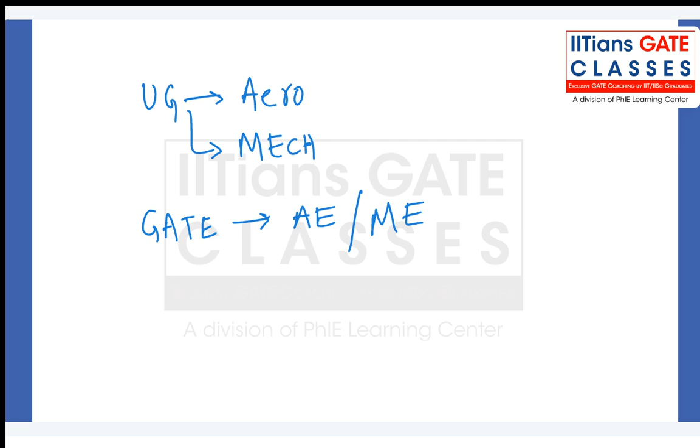Okay, one second, we'll write a few things about the GATE exam. I think most of you know this, but if somebody does not, I will tell you. Most of you have done your undergraduate in aerospace, right? UG in aero - most of you are from there, and some are from mechanical also.

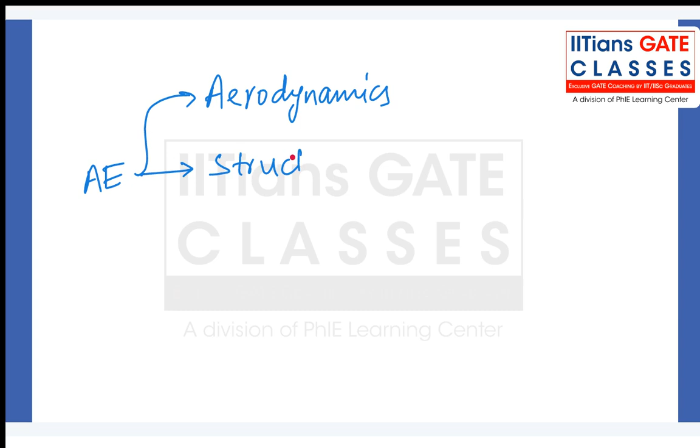In aerospace engineering, we broadly divide it into four parts, right? Basically four domains: one is aerodynamics, one is structures, other is propulsion, then we have controls, right? So these are the four domains into which aerospace engineering is divided broadly.

In aerodynamics, you get your fluid mechanics - actually the domain name is aerodynamics, but there is one more subject you will study which is also called aerodynamics, with the same name. Then there is one subject you will study called gas dynamics or compressible flow. These three subjects you will study in the aerodynamics domain.

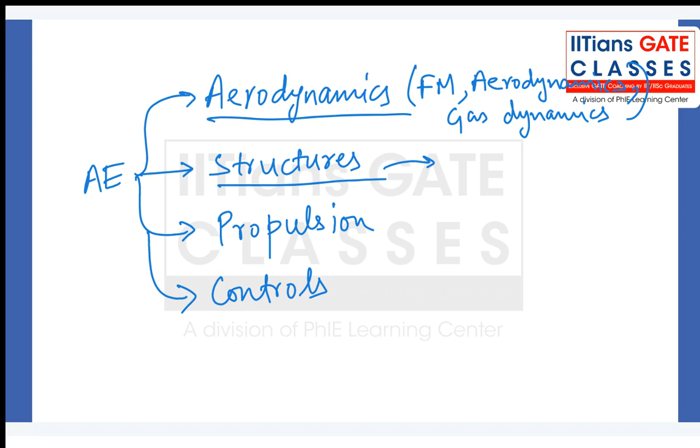Then there is structures, where you will have strength of materials or machine dynamics, something like this. Then propulsion will be your thermodynamics and related subjects - applied thermal, like Brayton cycle, power cycles basically, Rankine cycle, those kind of things you will study. Steam turbine, steam compressor, axial flow compressor - these kind of things you will study in the propulsion domain, right?

Then control is basically the electronics part of aerospace engineering, right? So in the last batch also, there were one or two students who had an electrical or electronics background, but they wanted to write GATE aerospace engineering because they wanted to go into controls. So for them, controls is a nice step to enter into the aerospace engineering field.

For people doing their undergraduate in aerospace engineering, you must have studied all four of these parts in your BTech, right - some basics about all of these four domains. So for you, all four of these domains are okay to proceed in, like if you are going for masters or something like this.

For people coming from a mechanical background, aerodynamics is actually a very nice branch because it has fluid dynamics, compressible fluid dynamics, those kind of things. And then you have structures where strength of materials will be used, machine design will be used for people from mechanical background. Then for propulsion, you guys already study thermodynamics, applied thermal engineering, power plant engineering - those kind of things will be used in propulsion.

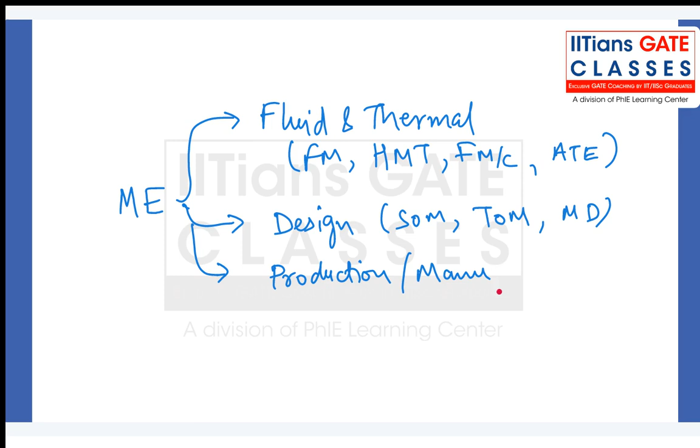Then for mechanical, the other part is design. In design, we basically study SOM (strength of materials), theory of machines, and machine design. These are a few subjects. Then there is production engineering or manufacturing part - this is for people writing the GATE mechanical engineering exam.

And then there is something called industrial engineering. It is basically related to increasing productivity of a production system, so it's a little bit related to MBA basically - business administration. So we have design, fluid, and production - these are the main departments in mechanical engineering.

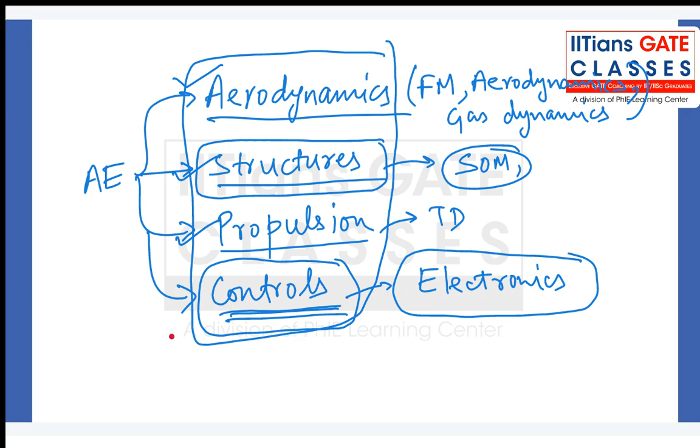So whenever you write GATE in aerospace engineering or mechanical engineering, it doesn't matter - fluid is the common part in both of these cases.

Now we will talk about the GATE exam. All of us know it is a 100 marks exam, where you get 70 marks for your core, whatever you have prepared, and 30 marks for maths and aptitude, which is common for all papers. So this 70 marks is what you are preparing for during your BTech. Suppose you are from aerospace engineering, this will be your 70 marks. Then from mechanical, your mechanical core will be there.

Then there comes one new paper which is called XE, or Engineering Sciences. Actually, I will say this is kind of a loophole for people who want to go for further studies, for postgraduate studies, MTech or PhDs, because IITs and IISc take students who have written GATE XE also for their MTech or PhD programs. XE actually is a very nice exam for people who have started very late in their preparations.

Why? Because in XE, you will get your 30 marks paper, same, maths and aptitude. Then there is a 70 marks paper, divided into two sections. Let's call this section 1 and section 2. Each will be of 35 marks. You have to solve this for 30 marks, this for 35, this for 35 - whole will make your 100 marks paper in XE.

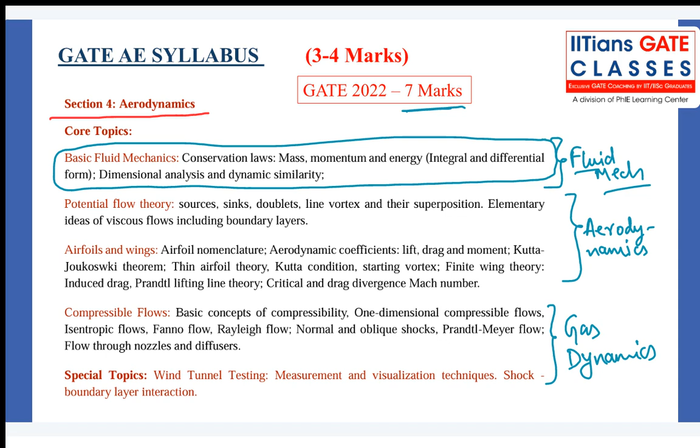For mechanical people, the weightage is quite more. It's 6 to 9 marks out of 65, out of 70. So you can say it's around 12 to 13% of your GATE exam.

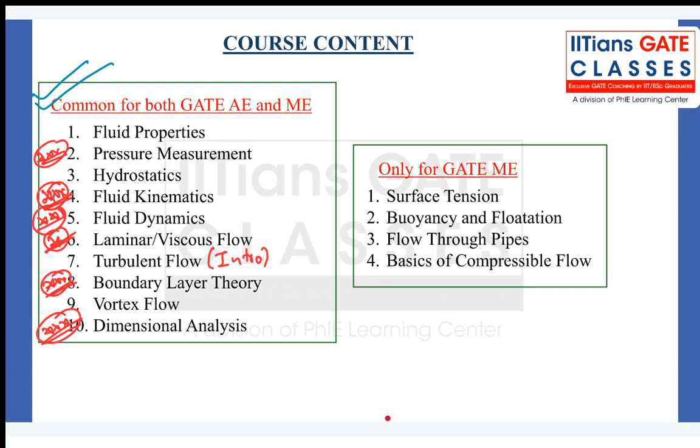Okay, so next. Okay, so I will tell you a few reference books.

There is one book called Cengel and Cimbala. Few people call it Chengel or Cengel, whatever you like to call it, and Cimbala. It's a very nice story-like book. Whenever you read any topic, you will feel like the book is talking to you. It's a very good book for concept building.

Then we have F.M. White, Frank M. White. He also has a very nice book for good concepts and good numericals. Then we have Som, Chakrabarti and Biswas. It's a more mathematical kind of book. Most of the topics they have explained in a mathematical way, not with a physical approach.

Then we have K. Subramanya. He has written a book with 1,000 problems in fluid mechanics. So it's a very nice book for problem solving. If you guys want to solve some nice problems, you can refer to this book.

Which is for thermodynamics, Cengel? Okay.

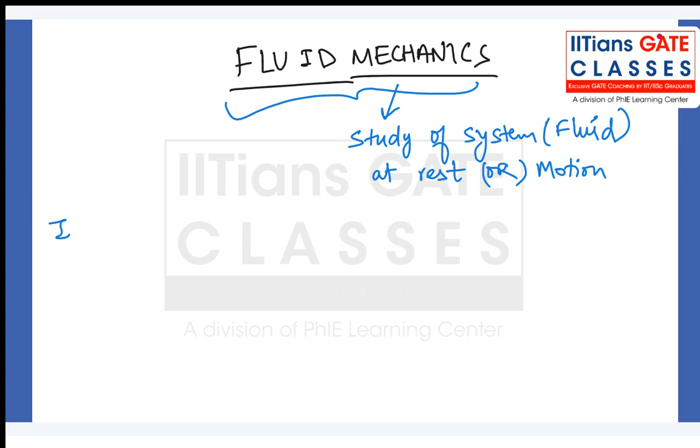It is the science which deals with fluid. Fluid means liquid or gases, anything which can flow, in rest or motion. So basically we are dealing with fluids which are either at rest or in motion.

Now my question to you guys is, what is a fluid? Because all of us understand what is rest, what is motion, but do we understand what is a fluid? To study fluid mechanics you have to understand both of these words, what is a fluid and what is mechanics. For mechanics we have defined this part, but for fluid we have yet to define it.

Then comes our second subtopic, which is fluid versus solid. What is fluid, and how is it different from solid? I will take two cases. For part A, let us say this is my ground, and I have this metallic block or wooden block, let us say it is a solid block.

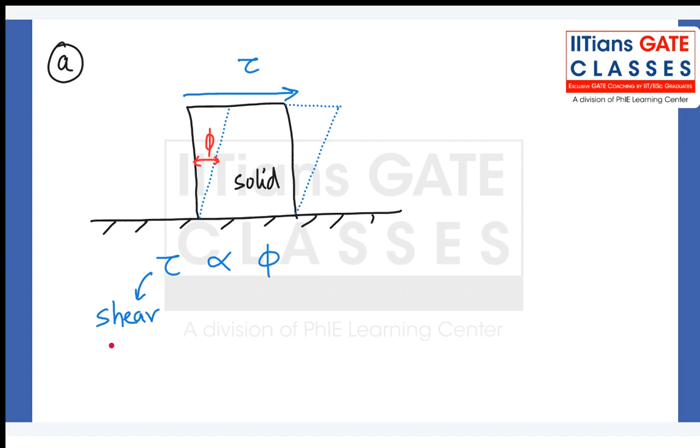Now what I am doing here is applying a shear stress on this surface. What will happen? The body will deform something like this, at some angle phi. Shear stress is proportional to shear strain, this angle phi. As I increase the shear stress, it will increase the shear strain. If I decrease the shear stress, it will decrease the shear strain.

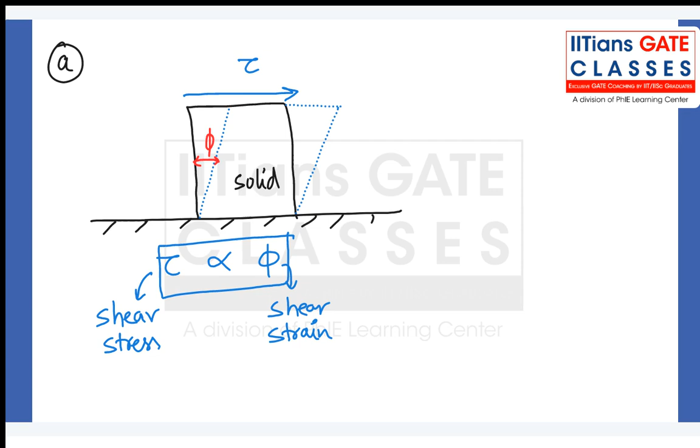That is what is meant by this proportionality sign, and to remove this proportionality sign, we introduce a constant g, which is tau by phi.

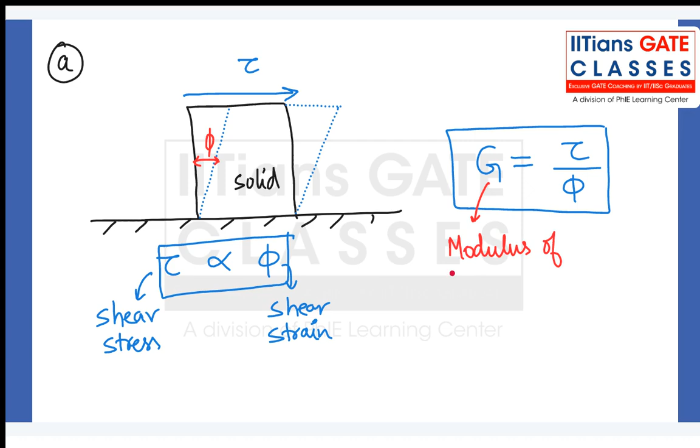This g is called the modulus of rigidity or shear modulus. We are applying shear stress and shear strain is being developed, so this modulus is called the shear modulus.

So this was about solid. What happens in a solid? Let us take... okay, I will make one graph here.

Let us say for the x-axis I have shear strain phi, and for the y-axis I have shear stress tau, and I will plot this. Here we can easily see shear stress is proportional to shear strain. As shear stress increases, shear strain will also increase. So the graph will go something like this, a straight line graph.

If you have a little idea about strength of materials, in class 11th you have also studied this stress-strain relationship. It goes something like this, and this is the fracture point.

My purpose of drawing this part is to show: for value of shear stress tau 1, we have a value of shear strain phi 1. For value of shear stress tau 2, we have value of shear strain phi 2. This is what direct proportionality means - for one value of shear stress, we have one value of shear strain.

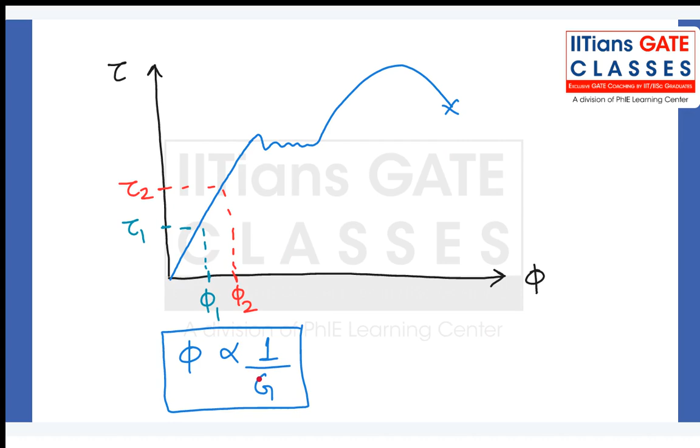In this case, I'm talking about when shear stress is not zero, when we are applying some shear stress. At that condition, if there is no shear strain, if phi is zero, this implies modulus of rigidity will tend to infinity. This kind of body, which shows no shear strain even after applying shear stress, is called a rigid body.

I think you guys have heard these terms before - what is a rigid body, what is an elastic body, those kinds of things. And if you don't know, don't worry, you will study these things again in the strength of materials topic.

Okay, so this was a little introduction about solids - what happens in solids. Now let us enter into the domain of fluids. What happens in fluids?

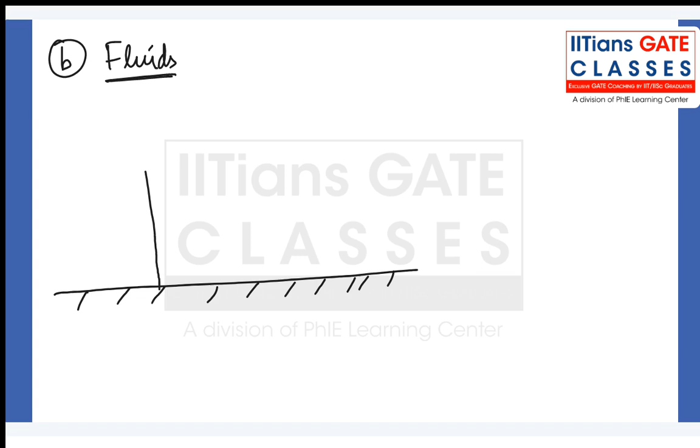Now again, I am making one reference ground level. Again, I will take one test element, but earlier it was solid, this time it is fluid. Again, I am applying some shear stress on this surface. Now what will happen?

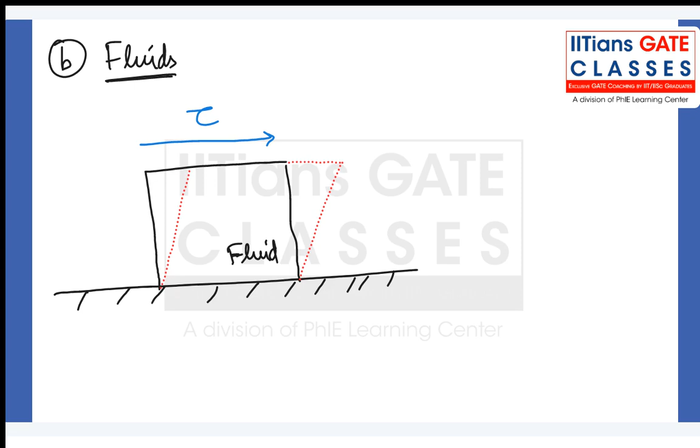Now things will change a little bit - it will continuously deform. Let us say at some time t1, we get our fluid element like this. At some time t2, we get it like this. At some time t3, we get it like this. So this is at time t1, time t2, time t3.

So our fluid element will change shape. Earlier also it changed shape, and right now, in this case too, it will change shape. But what is the difference here? Let us say this is angle phi 1, this is angle phi 2, and this whole is angle phi 3.

In the earlier case, our shear stress was proportional to shear strain. For one value of shear stress, we were getting one value of shear strain - a straight line, directly proportional graph. In this case, I have applied a single value of shear stress, but I am getting multiple values of shear strain.

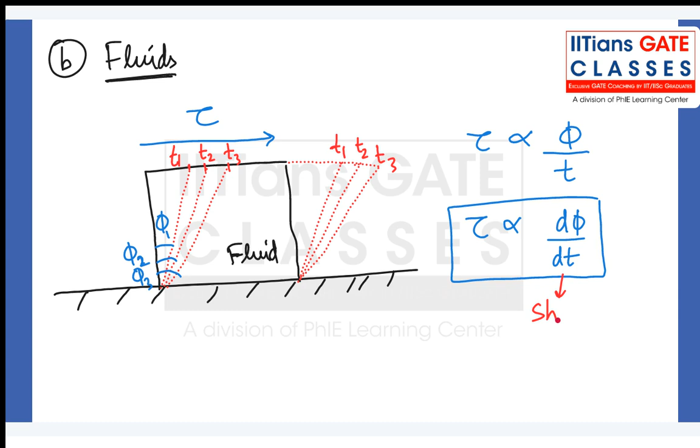Shear strain is dependent on time, it is a function of time - shear strain is changing. So earlier, shear stress was proportional to shear strain, but now it is proportional to strain by time, or strain rate. In differential terms, I can write tau proportional to d phi by dt, where this d phi by dt is called the shear strain rate - how shear strain is changing with respect to time.

Earlier it was a constant shear strain value. Now the shear strain value is not constant, it is changing with time, even though we are not changing the shear stress value.

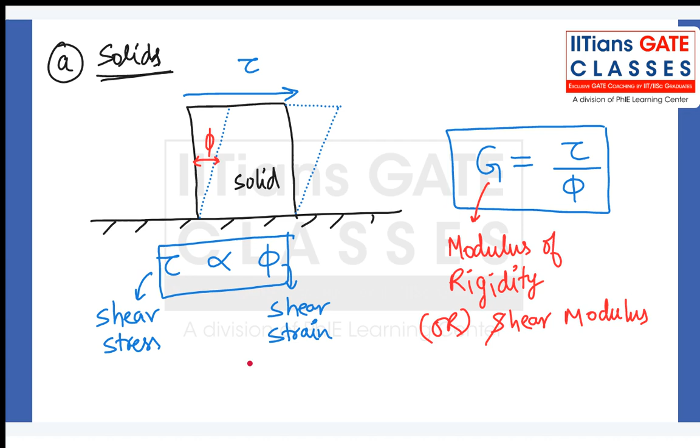Earlier, to remove this sign of proportionality, we introduced the modulus of rigidity, G. Again, we have to remove this constant of proportionality, so we will introduce a new term called mu. Tau will come out to be mu times d phi by dt. Now this mu thing is actually very important.

We will study about it in great detail. So for now, let us say this mu will come out to be tau divided by d phi by dt, right? And for shear stress to be constant, let's say one case where I'm not changing shear stress.

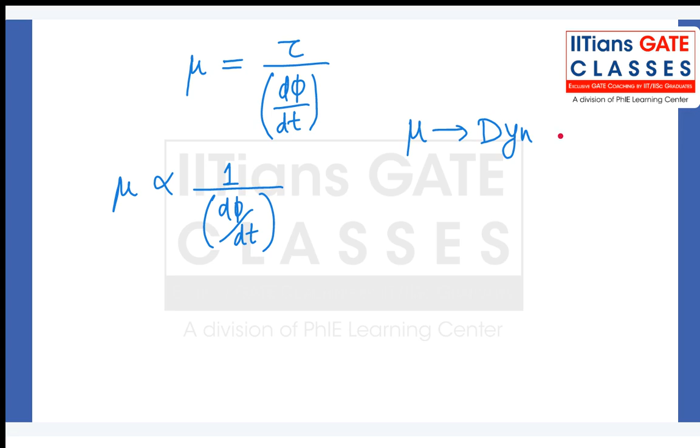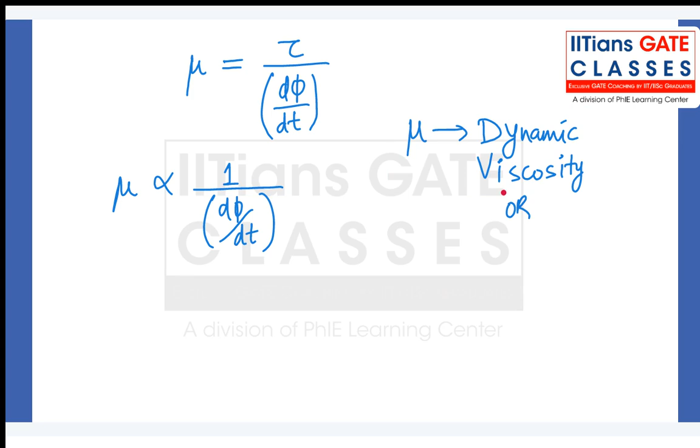So mu is inversely proportional to rate of shear strain, right? So I can say one thing. Let me name this part first. This mu is called as dynamic viscosity, or simply few people call it as viscosity. So I will write it as dynamic viscosity or simply viscosity. If viscosity is mentioned or dynamic viscosity is mentioned, you will always assume it to be mu.

Why am I telling you this? Because there is one more kind of viscosity which is called kinematic viscosity. So when we study this viscosity part in detail, most probably tomorrow or in the next class, I will introduce you to this new term called kinematic viscosity, and we will see the difference between these two things.

So here what I wrote is that mu is inversely proportional to rate of shear strain. So as rate of shear strain increases, mu will decrease, or vice versa, right? So let us say I have two cases here.

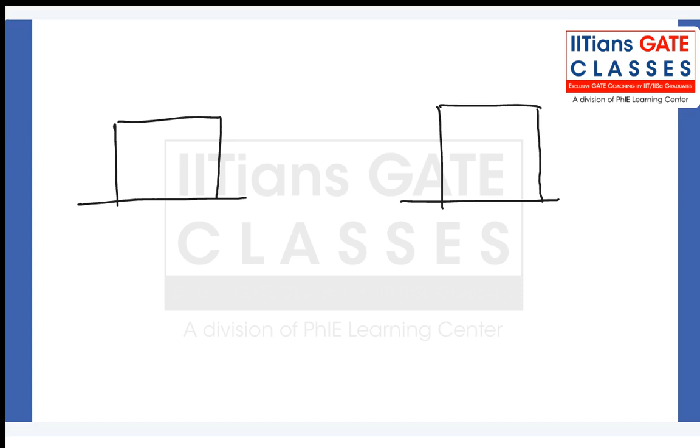Let us say I have two different fluids. One fluid element is like this, and the other fluid element is like this. And I'm applying the same value of shear stress on both of them. Tau is same for both fluids, and both will have some deformation. Let us suppose this fluid deforms like this, and this one deforms like this. So we have this angle as phi 1 and this as phi 2. And let us say this deformation took dt time in both the cases.

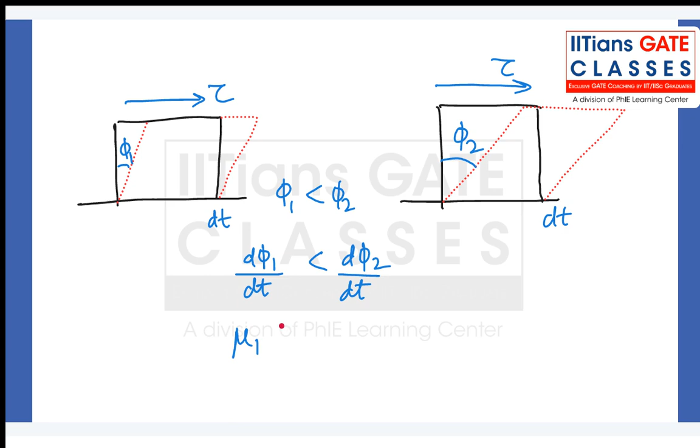So since time is same in both cases, I can write d phi 1 by dt less than d phi 2 by dt, because phi 1 is less than phi 2. And since viscosity is inversely proportional to shear strain rate, I can write mu1 greater than mu2. This means for same shear stress, fluid 1 is showing less deformation. This means it is more viscous, so mu1 is more than mu2.

Is there some doubt, or is this picture clear? Sir, is mu1 having more stress? See, tau value is same in both the cases, time is also same in both the cases. Only difference is these shear strain angles, phi 1 and phi 2. So this means we can conclude: for same shear stress at same time, if some fluid gives less deformation, that fluid is more viscous.

So with that, we introduce a new property called fluidity, which is nothing but 1 by mu, known by F. So I can write mu1 greater than mu2, or F1 less than F2 — fluidity of 1 is less than fluidity of 2. Actually nobody uses this property called fluidity, but for the sake of information, I am telling you it exists. In most cases, you will deal with mu only.

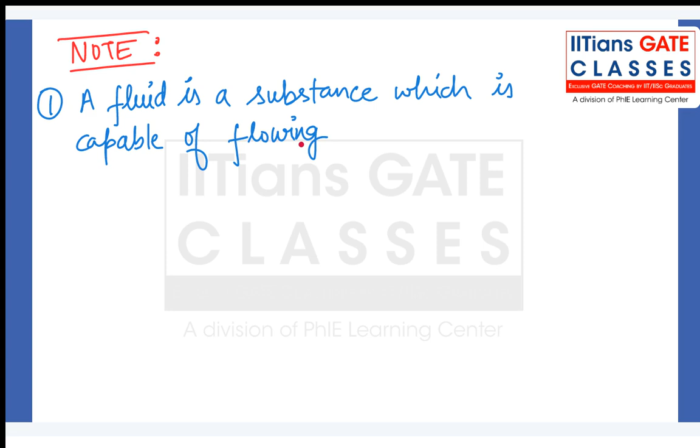And what does this term flowing mean? Continuous change of shear strain, yes. Flowing or deforming under the action of shear force, however small the force may be.

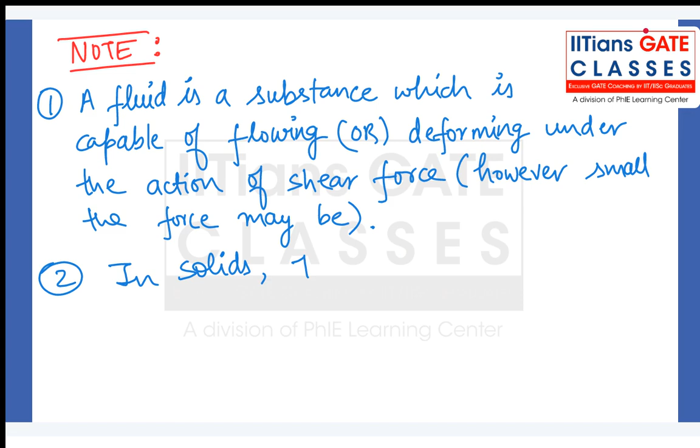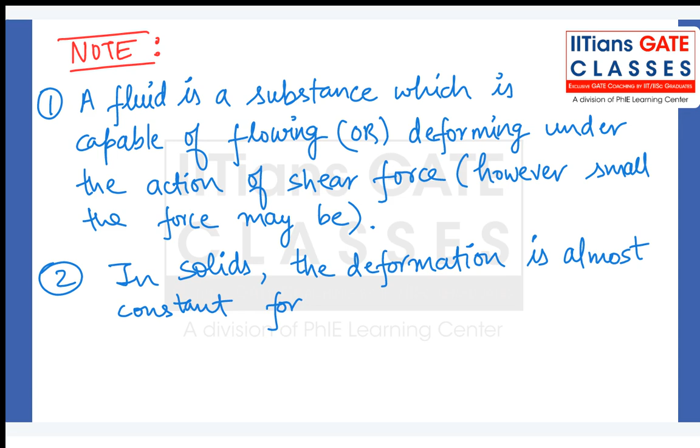Point number two. In solids, the deformation is almost constant for a given stress. Basically, for one value of stress, we have one value of strain.

But in fluids, the deformation changes with time. So in fluids, rate of deformation is more important than deformation itself.

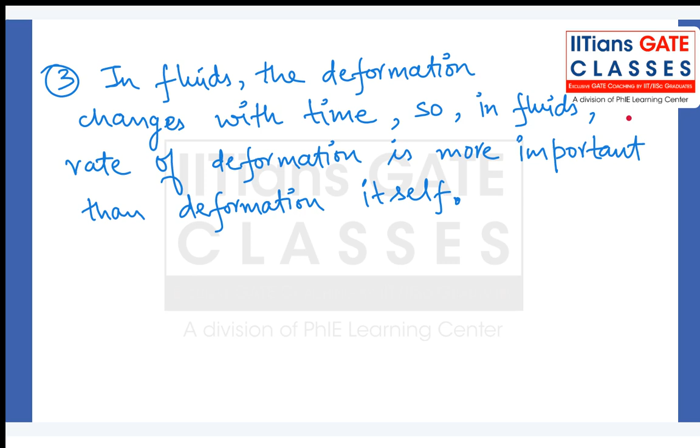Right, so I will summarize. I will make a summary table actually: solids versus fluids, what are the things we have studied. For solid, we have tau proportional to phi, and tau is equal to G phi. For fluids, we have tau proportional to d phi by dt, and tau is equal to mu d phi by dt.

Okay, so now let us enter into the next topic, which is the topic of continuum, concept of continuum.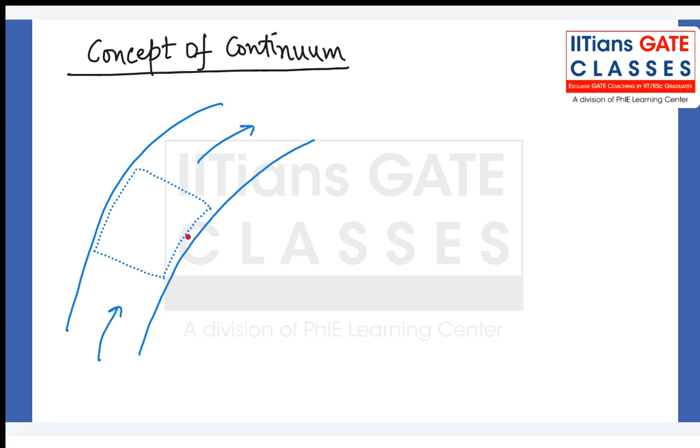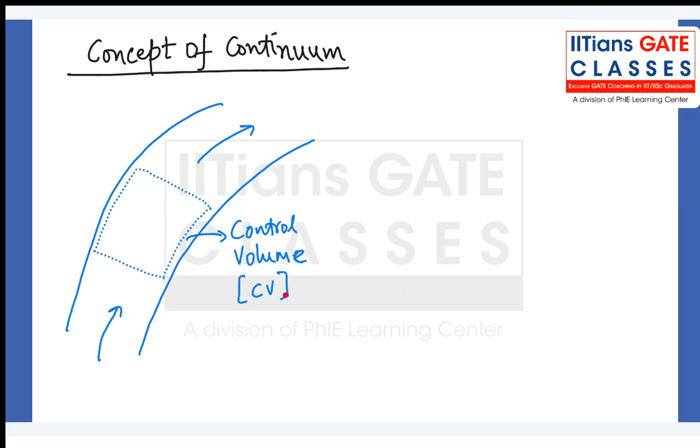So let us start this. Let me say this is a fluid column, a fluid is flowing like this. I will take a test element here for my analysis. I will mark an area or mark a volume for my analysis, whatever I want to check, let's say how the acceleration is changing, or the velocity, or the pressure, density, whatever property I want to check. I have marked this volume in this flow, and let's say the fluid is flowing in this direction, and I have marked my volume here. So this kind of area of interest is actually called as control volume, or in short, CV.

So for my control volume, this is nothing but my area of interest. Like in thermodynamics, you guys are familiar with the terms system and surrounding, right? System is the part of the universe which is under your consideration right now, on which you are focused, what changes this part will show me, that is your system. Anything away from the system is surrounding for you, and system plus surrounding makes the complete universe. This is the first topic taught in thermodynamics class. So in fluid mechanics, we call that system as control volume, nothing else, it's not a new thing. So for that control volume, there is one thing called characteristic length, LC.

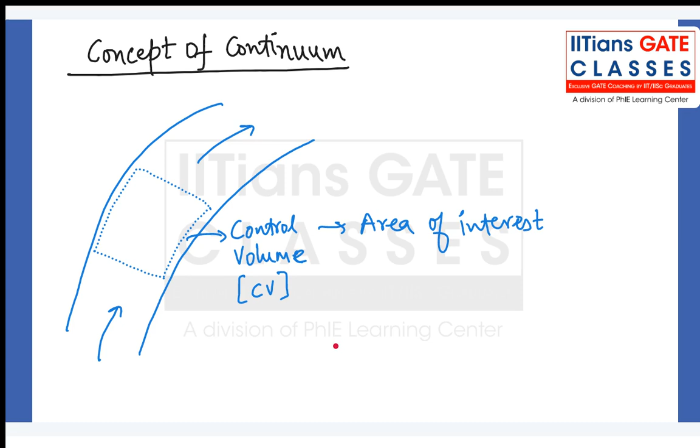Characteristic length, it is written by LC, or some people call it characteristic dimension. It doesn't matter what you call it, at the end of the day it is a length, nothing else. This is the length which is used to define dimensionless numbers.

We have a topic which is actually the last topic in this subject, called dimensional analysis and similarity. In dimensional analysis, I will explain what this characteristic length is, and what dimensionless numbers are. But for now, there's a very famous dimensionless number which you guys already know, called Reynolds number. You guys already know this part, this is what I'm assuming.

If somebody is not aware of Reynolds number, or has not heard about it, please tell me now. Otherwise I will assume you have heard this name. So everybody has heard it, right? This Reynolds number, what does it tell you? Whether the flow is laminar or turbulent. Reynolds number tells you this thing. What is this Reynolds number, how is it defined? Those things we will discuss in the dimensional analysis chapter.

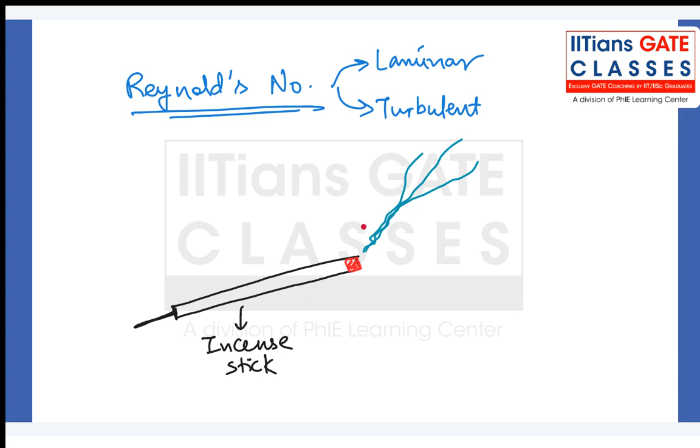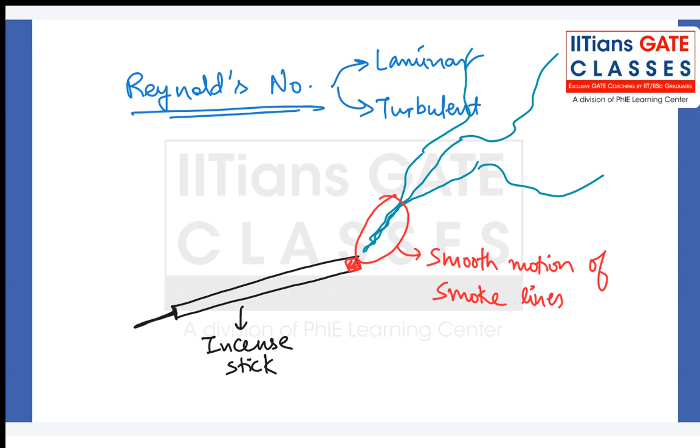So you will see the smoke lines initially. The smoke lines will be traveling in a very smooth manner, a smooth motion of smoke lines. Initially they will travel very smoothly. After traveling some distance, they will go like this, one line will go like this, something like this. Some haphazard motion will start. I think all of you have observed this. So this is haphazard motion, and this is the smooth motion.

Now this haphazard motion actually corresponds to turbulent flow. This smooth motion corresponds to laminar flow. So I'm just giving a very basic idea of how you, in your daily life, see laminar and turbulent flows.

Correct? Sir, I cannot understand the difference, sir. Okay, so you have never seen an incense stick? Yes sir. Or, for that matter, if you smoke, have you ever seen somebody smoking a cigarette? Yes sir, you have seen it, right?

So near the tip where it is burning, the smoke leaves in a very smooth manner, right? After traveling some distance, the gas particles disperse and move in their own directions, they are not moving together or moving smoothly. So these are two different kinds of motion of the smoke particles in that regime. The one which is smooth is called laminar flow, and the one which is moving haphazardly is called turbulent flow. Okay sir, now I understood. I'm giving you a very crude example right now, but still for initial purposes this example is okay. So let us understand what is laminar and what is turbulent very crudely for now.

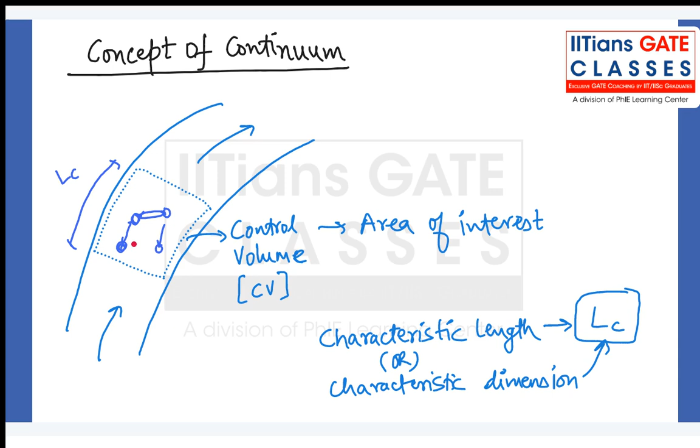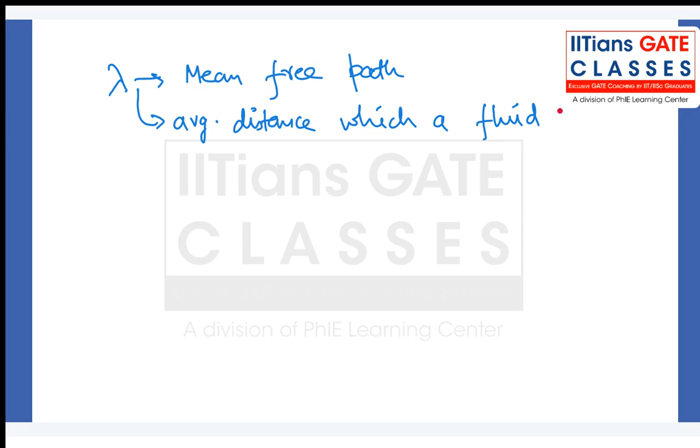Now there is a term called lambda, which is called the mean free path. What is this mean free path? It is the average distance which a fluid particle has traveled since its last collision. Try to understand this definition: since its last collision.

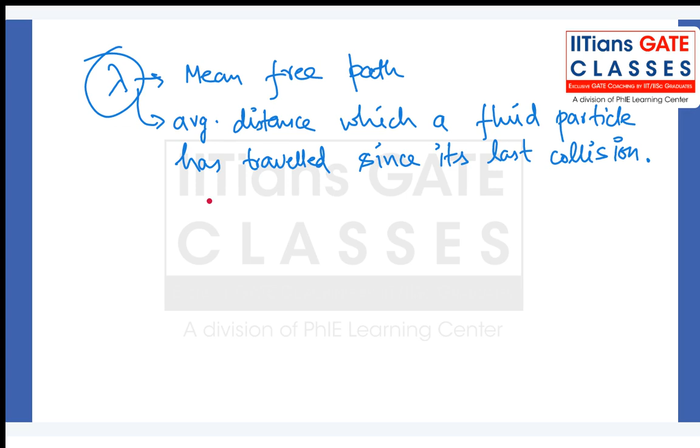Now I will make one control volume here. This is my control volume, and there are molecules, or fluid particles, inside it. Let us suppose there are some number of fluid particles here, and obviously they will collide into each other. Something like this.

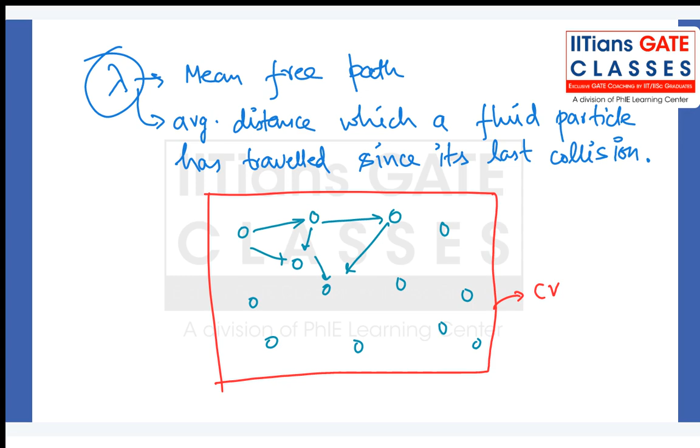And I have one more control volume. Let us say this is CV2, and this is CV1 — control volume 1, control volume 2. In this control volume 1, let us say there are only three fluid particles. They will also collide into each other, it doesn't matter. This lambda, or mean free path, is the distance which a fluid particle has traveled since its last collision. Let us say this has lambda 1 as mean free path, and this is lambda 2 as mean free path. Tell me, what will be larger, lambda 1 or lambda 2?

For the time being, assume both control volumes are of the same size. I have drawn them differently, but let us assume the size of the control volume is the same. Now tell me, will lambda 1 be bigger or lambda 2 be bigger? Lambda 1 will be bigger, right? Because the number of fluid particles is less in the same control volume size.

So what I mean is the characteristic length LC of control volume 1 and LC of control volume 2 is the same: LC1 equal to LC2. This means the size of the control volume is same, but still lambda 1 is more than lambda 2. Why? Because the number of molecules is less in CV1. So the mean free path of control volume 1 will be more than that of control volume 2, because of the difference in the number of fluid particles.

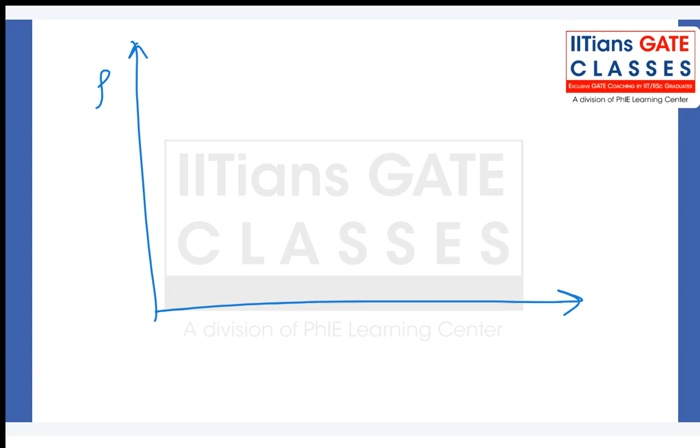Now comes the concept of continuum. This is my density — on the y-axis I have made a rho, or density, curve. Density simply means how densely fluid particles are packed inside a control volume. I can say density of 2 is more than density of 1.

Mean free path is also affected by the velocity or energy of particles, but let us assume they are the same in both cases. Everything is identical in both control volumes — energy, velocity, everything — only the number of molecules differs. So we can say that rho 2 is greater than rho 1, because the number of particles is more in the same volume.

So the graph shows something like this. This is the limit where we say... and then the x-axis actually is the volume. Let us say this is some volume, dV. So when the volume is more than dV, the characteristic length is more than the mean free path. When the volume is less than dV, the mean free path is more than the characteristic length. So only in this zone is continuum applicable.

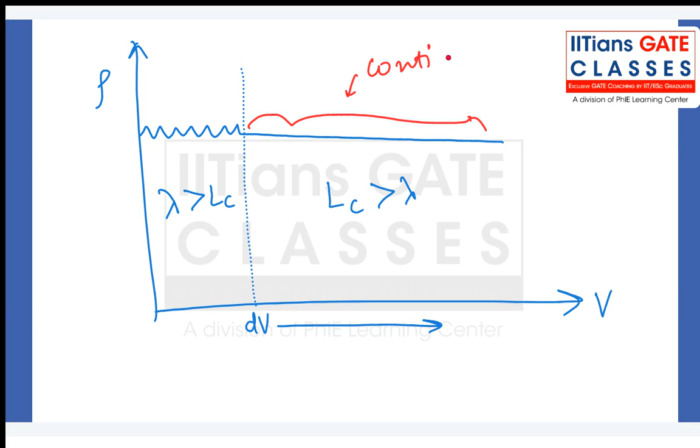What does the characteristic length tell you? The size of control volume. The size of control volume is much bigger than the mean free path. This means the fluid molecules are very densely packed inside the control volume. So we can assume the fluid as a continuous medium. We do not need to analyze this fluid molecule by molecule. We can assume this is a continuous medium.

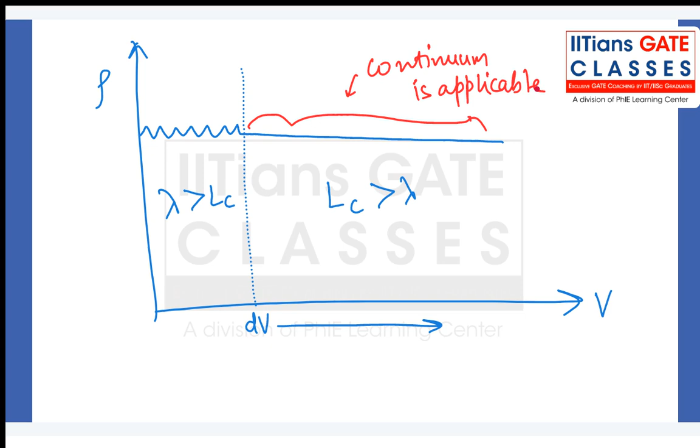But if mean free path becomes more than characteristic length, then our molecules are so far away from each other that sometimes they are getting out of your control volume, sometimes getting inside it. So in this case, you have to analyze each molecule in itself. That's why in this zone, the analysis we use is called rarefied gas theory, because the gas molecules are very rare here. And more than that, we have the continuum approach.

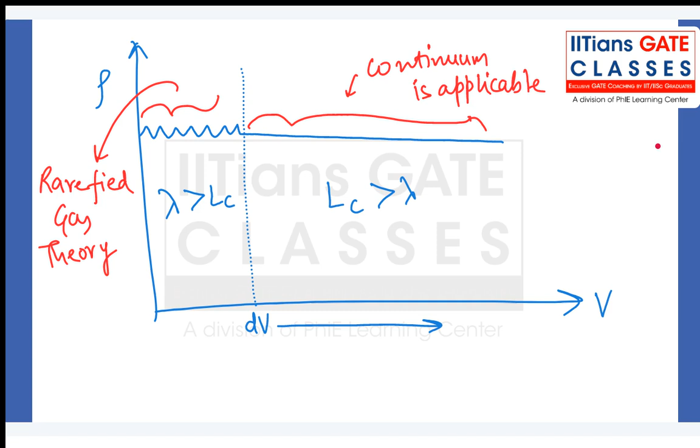So in this fluid mechanics subject, we will always assume continuum approach. Continuum is applicable everywhere for us. Wherever we do any kind of analysis, we will assume this. We will not assume anything molecule by molecule. We will see that it is a continuous medium. Fluid particles are one after the other, so whatever happens in this fluid particle, the same kind of property change will happen after some time in the same control volume. Is it clear? Any doubts? Okay.

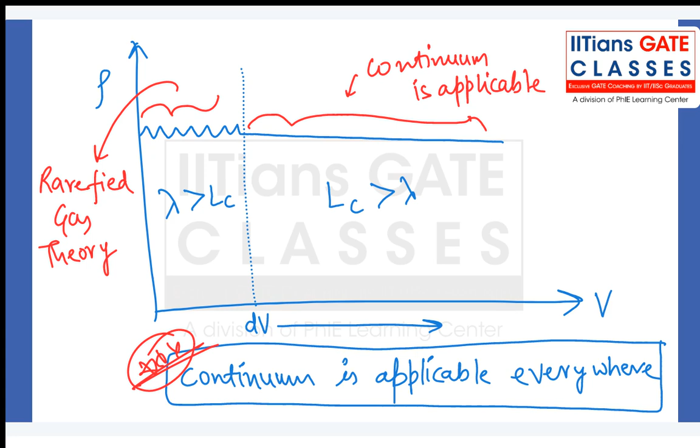Now we will enter into our next subtopic, which is called the no slip phenomenon.

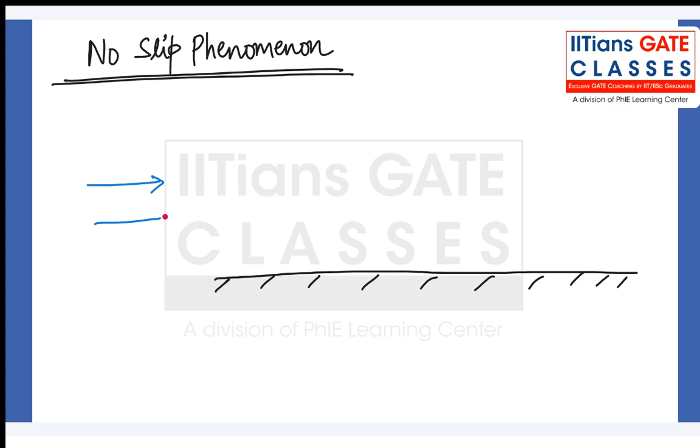No slip phenomenon. Let us say this is a solid surface, a metallic plate, like this. And then I have this fluid coming from this direction. This fluid has some viscosity mu and some velocity, free stream velocity u infinity. This free stream condition we generally denote with this infinity symbol. U is velocity, it is a free stream velocity, u infinity. What do you mean by free stream? Basically, it is not flowing near any solid surface, then I call it free stream. And the solid surface will start from this point, this is the leading edge of the plate. For now, let us say the speed of this surface, us, is 0, it is at rest. Now what will happen?

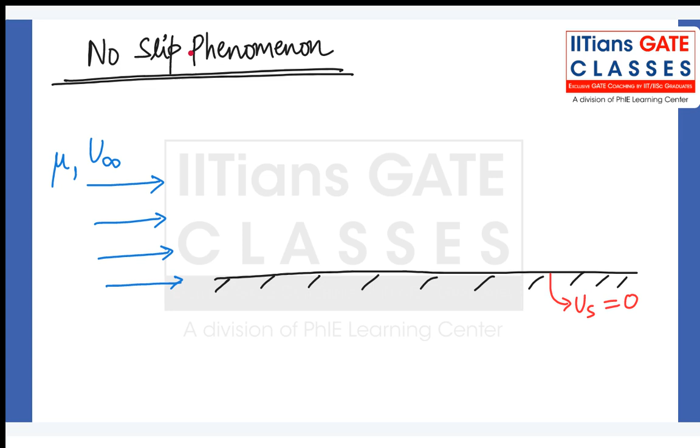This lowermost layer of fluid will interact with the plate first. Now what does this no slip phenomenon tell you? It tells you that fluid particles will not slip over the solid boundary, they will stick over this solid surface. This is the no slip boundary condition basically. With respect to the solid boundary, the relative speed of the particles will be 0, so I can say the fluid particles' velocity will also be 0 here. Correct?

Now there is one more layer which was flowing above this lowermost layer. Now its molecules will start flowing over it, they will go something like this. But there is some kind of interactive force between these fluid molecules, some attraction force is there. This kind of force is called cohesive force. Cohesive force is there between fluid molecules. Now this molecule is stuck to the plate due to no slip phenomenon.

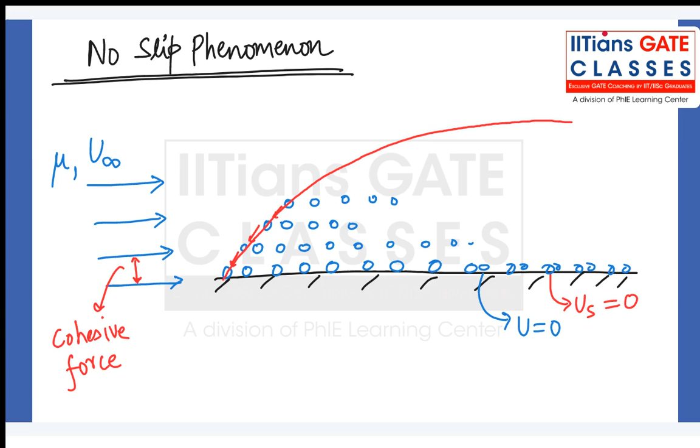Now this upper layer of molecules is trying to flow over these molecules. Due to this cohesive force, they will pull the upper molecules. Similarly, the fluid molecules of the upper layer will also want to go here, they will also be pulled like this. Then again, they will also be pulled like this. Similarly, slowly, a layer is being formed over the plate. Can somebody guess the name of this layer? Boundary layer, sir. Nice. So this is your boundary layer.

Now at any cross section, let us say I mark this as my cross section for analysis. I want to draw the velocity profile, I want to check what is the velocity. For the lowermost layer, the velocities are 0, because they are sticking to the plate due to no slip. The layer just above it, these molecules have moved a little bit of distance, so they will have some little velocity, but very less. As we move further away from the plate, the velocities will be a little more, and again they will increase as we go away from the plate. So our velocity profile becomes something like this, and at the edge of the boundary layer it will be close to u infinity, or 0.99 of u infinity, 99% of u infinity. And after the boundary layer, effects are not there, so it will be u infinity.

Correct? Is this whole picture clear? How boundary layer is forming and how the velocity profile is being generated?

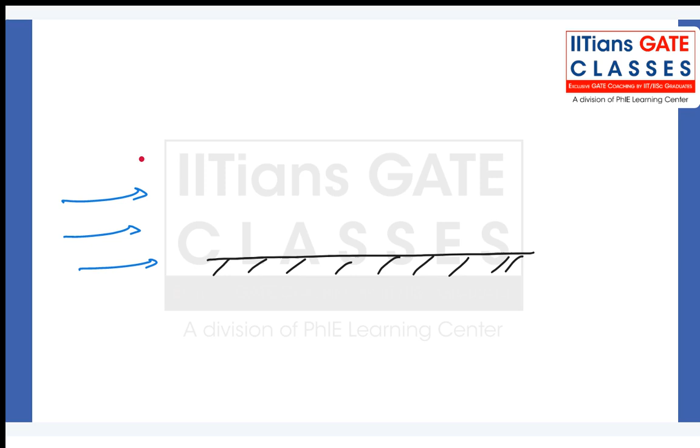Let us say the fluid particles are coming like this. So over the plate, if I want to generate a boundary layer, it will be a very thin region. So the velocity profile will be parabolic like this, and then there will be no velocity gradients above. So u infinity, and there will be some value less than u infinity. I have zoomed in this part to explain it to you, so you don't think the boundary layer is very thick. It's a very thin portion in fluid flow.

Okay. So when viscous fluid flows over a solid surface, bulk of the fluid molecules acquire the velocity of the surface, which is called the no-slip phenomenon.

Let us suppose this surface is moving with some velocity. In the earlier condition, we said the surface is at rest, US is 0. Let us suppose now it is moving with some velocity. So the lowermost molecules will also start moving with the same velocity. Basically, relative velocity between the surface and the layer near about it will be 0. This bottommost layer will not slip over the solid surface. So this means when viscous fluid flows over a solid surface, bulk of the fluid molecules acquire the velocity of the surface. This sticking phenomenon is known as the no-slip phenomenon.

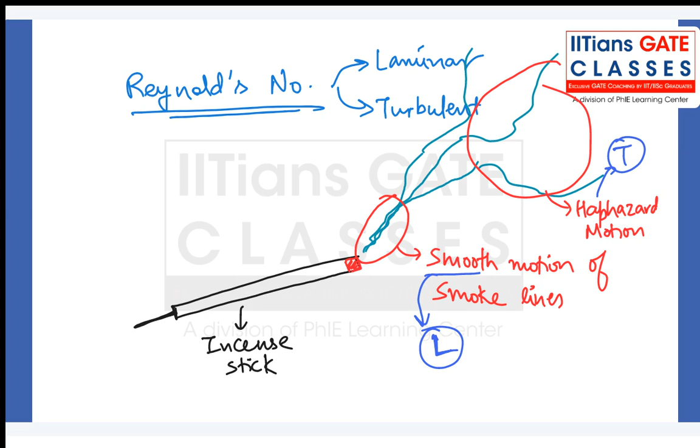Okay, so we will enter into the domain of fluid properties then. Okay, so we'll study for another half an hour. Let me see what topics we have. Okay, so we will start with fluid properties.

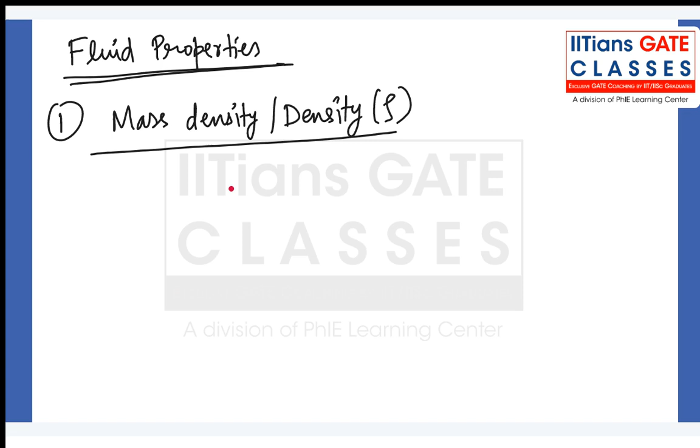What are various fluid properties which are important for us to study? First of all, we will study mass density, or simply known as density, denoted by the symbol rho. I think all of us know this mass density is basically mass per unit volume. So units are kg per meter cube, right? Okay, volume.

So I will do one thing. This V, it will again come in this subject, and sometimes it will be treated as velocity. So to not get confused with velocity, for volume I will write V with a horizontal strike. This symbol is for volume. So mass per unit volume. It is defined as mass per unit volume at a specified pressure and temperature in the fluid, because densities change with pressure and temperature.

So let us suppose at 4 degrees Celsius and 1 atmosphere pressure, density of water will be 1000 kg per meter cube.

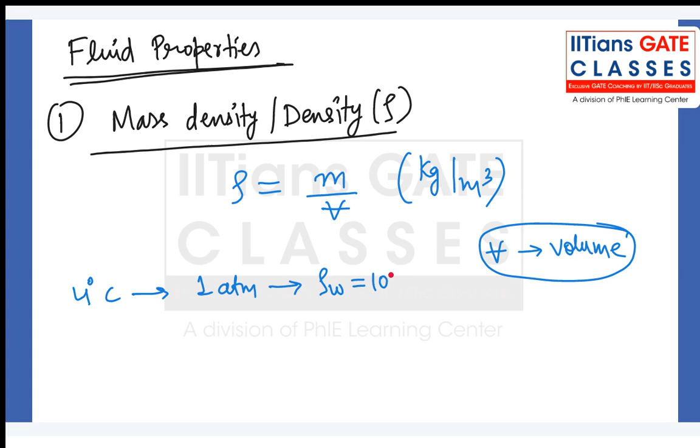Now when I am talking about 20 degrees Celsius, I have increased the temperature, but my pressure is same. What do you think density will be? Will it increase, decrease, or remain same? I have increased the temperature, pressure is same. Will density increase or decrease? It will decrease. Density of water is close to 998 kg per meter cube.

Now let us say we keep the temperature constant at 20 degrees Celsius, but I increase the pressure to 100 atmosphere. Now what will happen? Will density increase or decrease? I am increasing the pressure. Will density increase or decrease? It will increase.

See what is happening here. Density tells you how closely the fluid particles are packed, right? In the first case, pressure was same at 1 atmosphere, but I increased the temperature. With increasing temperature, kinetic energy of the molecules will increase. With kinetic energy, molecules will move further away a little bit, so the density will be decreasing here. When molecules are moving further away, their mean free path is increasing, so they are getting less closely packed than earlier. This means their density is decreasing.

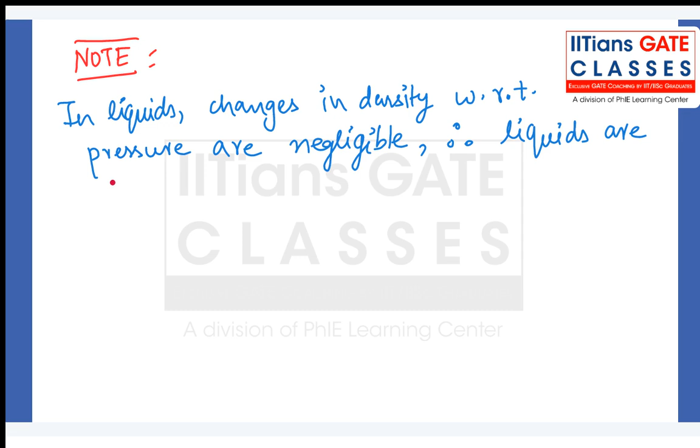So I will write a note here. In liquids, changes in density with respect to pressure are negligible. 0.9% is negligible; less than 5% we treat it as negligible. Therefore, liquids are treated as incompressible.

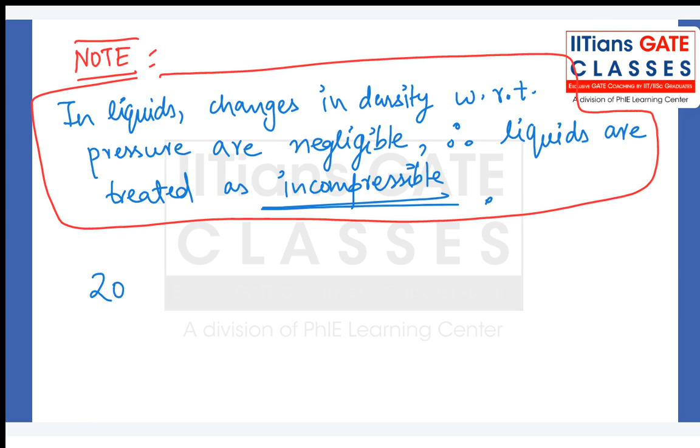Now what about gas? Fluids are of two types, right? Liquids and gases. Now for gas, let us take example of air. So for air, let us say I'm giving you this data so you can remember it if you want to use it anywhere in the question. Density of air at 1 atmosphere is close to 1.23 kg per meter cube. If density changes are less than 5%, we treat it as incompressible; otherwise, it will be compressible.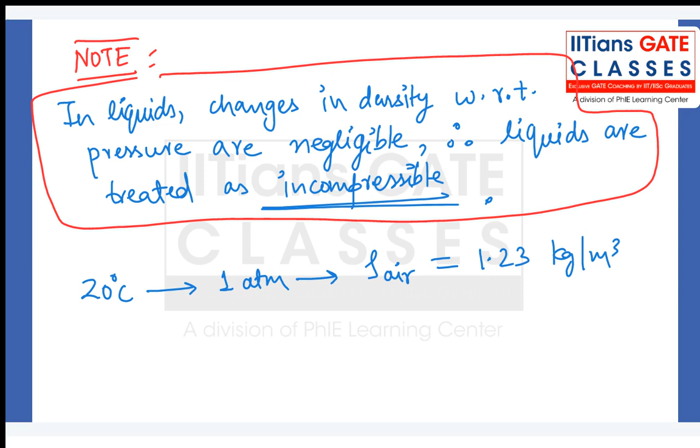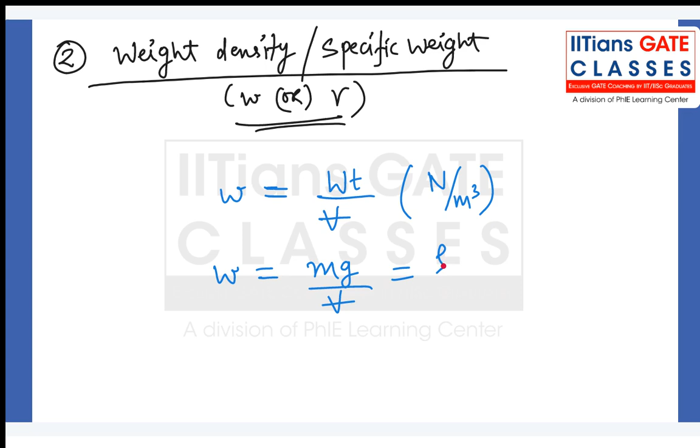So this was the first property, mass density or density, whatever you would like to call it. Then we have our second property, which is called weight density, or some people like to call it specific weight. It is denoted with small w or gamma. Mass density was mass per unit volume; this weight density is weight per unit volume, so its units are Newton per meter cube, whereas mass density was kg per meter cube. So I can write it as mg by V, and m by V is rho, so rho g. So this specific weight w or gamma can be written as rho g.

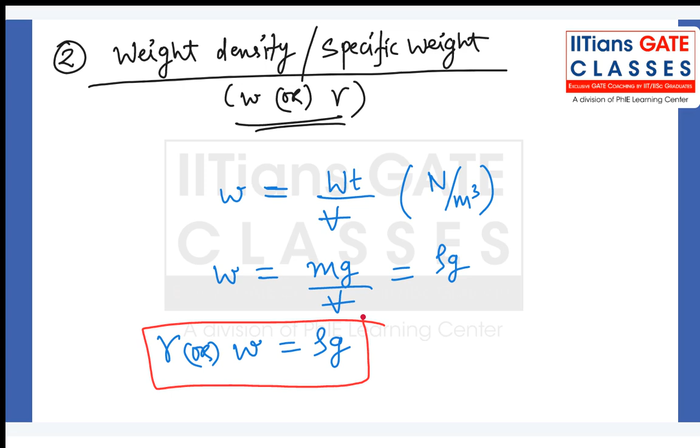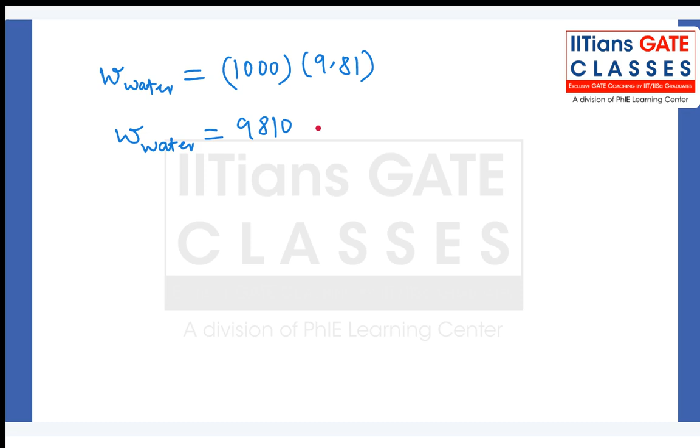Few numbers I am giving you: specific weight of water, which is rho g. Rho means density of water, 1000. G is 9.81. So specific weight of water will be 9810 Newton per meter cube.

This Newton per meter cube is actually the SI unit of weight density. Then there is one unit system which is sometimes shown in questions: 1 kilogram force. This force is actually equal to force applied by 1 kilogram mass, which is nothing but 9.81 newtons.

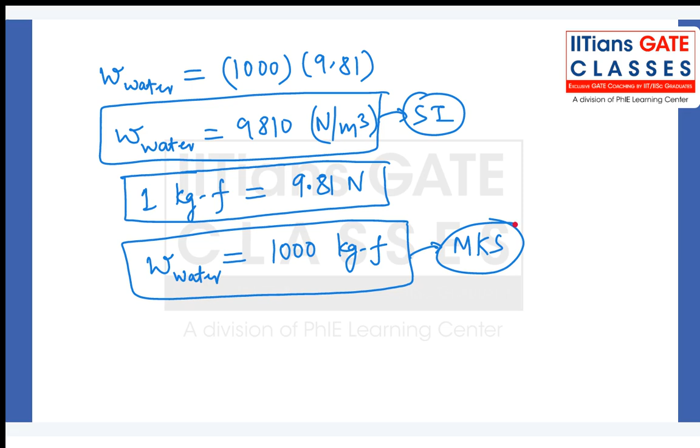1 kilogram force is 9.81 newtons. So if I write the specific weight of water in terms of kgf, it will come out to be 1000 kgf, and this will be in units of the MKS system. MKS means meter kilogram second.

Then there is the CGS system of units: centimeter, gram, second. Then there is the FPS system of units: foot pound second. It's used in America only. So these are three systems of units. I think you guys have studied these in class 11th or so.

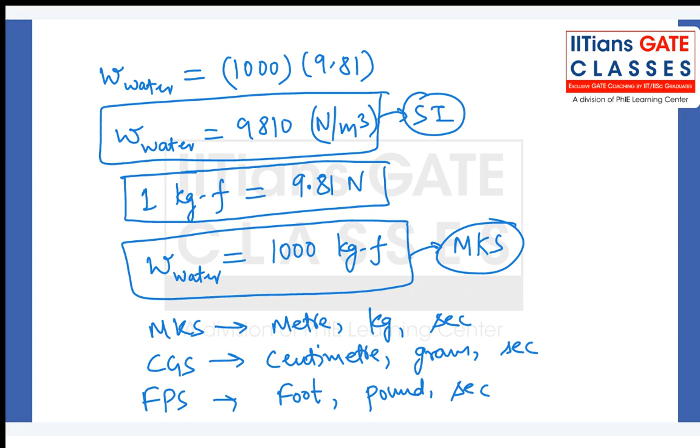Okay, so then we have our next property called relative density or specific gravity. We will have its subtopic as specific gravity, which will be useful for you in many questions. Relative density RD is actually density of one fluid with respect to some standard fluid, or you can say relative density is density of one substance with respect to another substance: rho 1 with respect to rho 2. Basically it's relative to that.

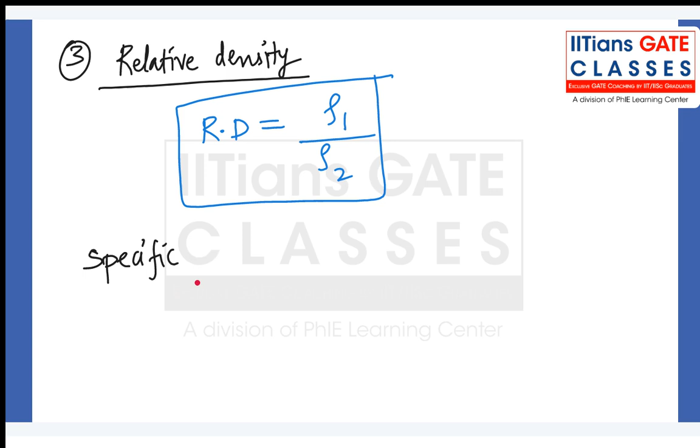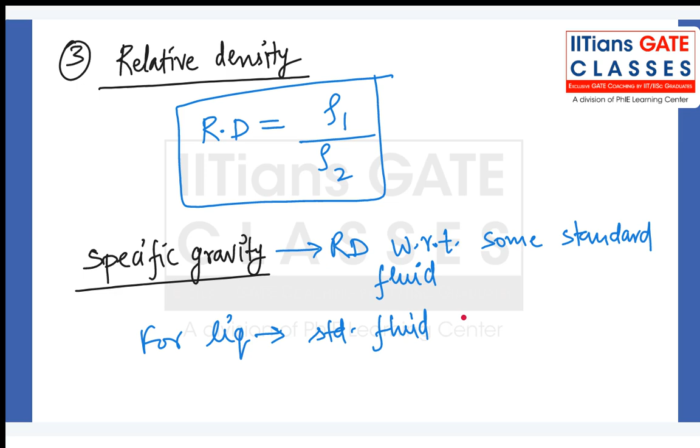Its subtopic or special case is called specific gravity. What is specific gravity? It is relative density with respect to some standard fluid, for liquids. Standard fluid is water for liquids and solids. And for gases, standard fluid is air.

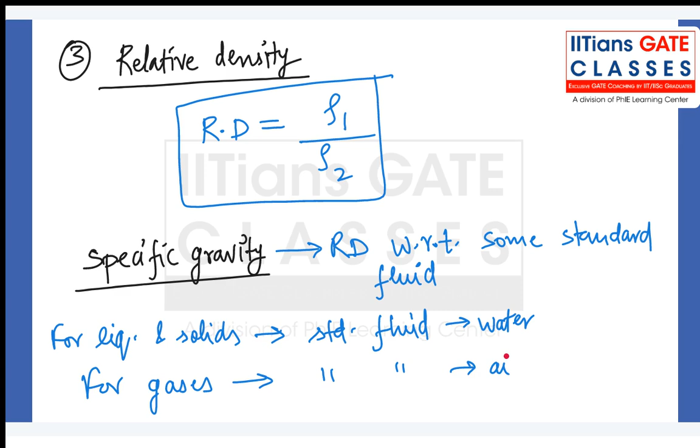So if I want to calculate specific gravity of any fluid, I will take the density of that fluid and divide it with some standard fluid. Let me give an example: specific gravity of mercury, Hg, is equal to density of mercury. Mercury is a liquid, so standard fluid will be water.

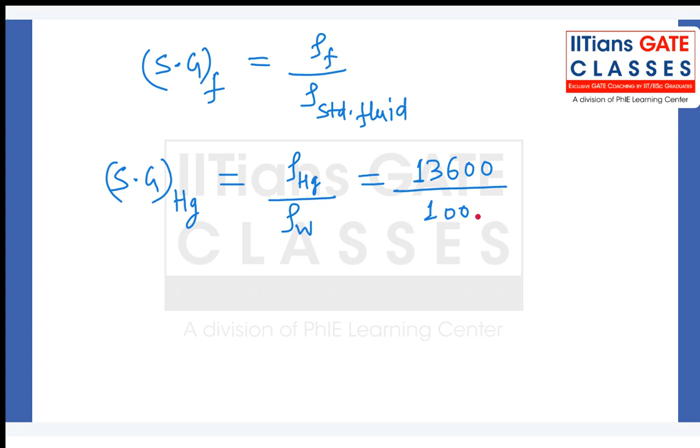Density of mercury is 13600 kg per meter cube. Density of water is 1000, and for most cases you can treat density of water as 1000 kg per meter cube. So the specific gravity of mercury will be 13.6. Since it is a ratio between two same quantities, it does not have any units. Density of mercury has kg per meter cube, water also has kg per meter cube, so those units cancel out and it becomes a dimensionless quantity.

Correct? And let's say for solid, specific gravity of wood, if it is given as 0.6, what does this mean? This will mean that density of that wood will be 0.6 multiplied by the reference fluid, which for solids also is water: 0.6 into 1000. So it will be 600 kg per meter cube.

Is there any doubt till now? Question, sir, it should be divided by, sir? No, in this case you have been given specific gravity, you have to calculate density. In case of wood, you are talking, right? Yes, sir, is it clear?